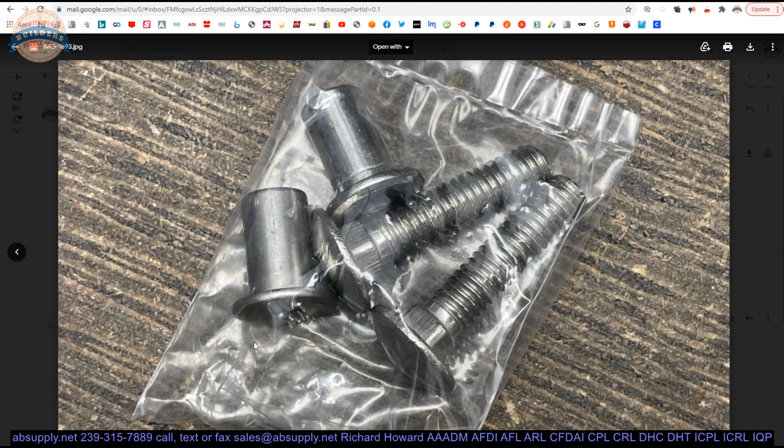Here's the item that we are looking at. Let's take a look at some photographs that we have linked to down below. There's the box, the guard in its packaging, the guard itself, additional views on the item. That's the underside. That's your bolt package. Carriage bolts, through bolts, really. Or sex bolts is what they are, but that is a carriage bolt that's there. Can't really see it, but it's a square head.

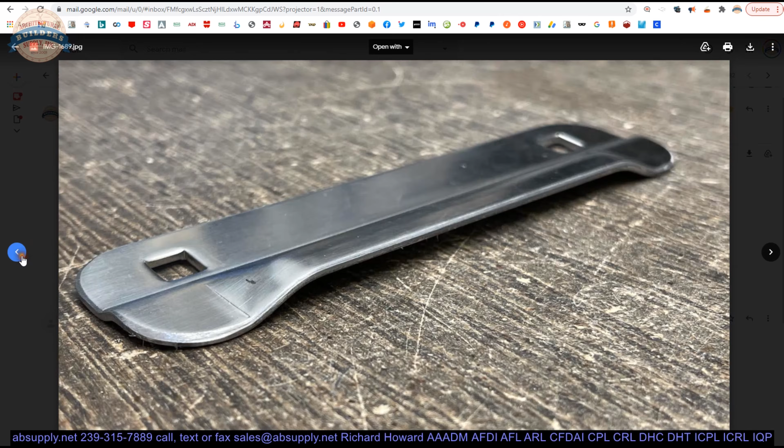Okay, let's take a look now at the extended description of the item. We'll scroll down. 1.5 by 6, lock type cylindrical. Sure, you can use this for cylindrical latches. You can also use it for a mortise lock. There'd be no reason that you couldn't use it for a mortise lock. I think what they're saying is that 1.5 is narrow enough to the point where you won't necessarily have a conflict.

That's the frame. Sorry that's so awful. Let's just get rid of that. We really don't need it anyway. Okay, so you've got a petite little latch guard there. Well, your rose from a cylindrical lock, you want to make sure that that is not going to run into your latch guard.

Okay, now if you have a really large diameter, you'll have latch guards that will have this sort of scalloped preparation in them because they're greater than 1.5 wide. If you have a mortise lock, you probably won't have that sort of problem, although you could. You have to be mindful of that. You have to be mindful of the backset from the edge of the door to the center of the hole.

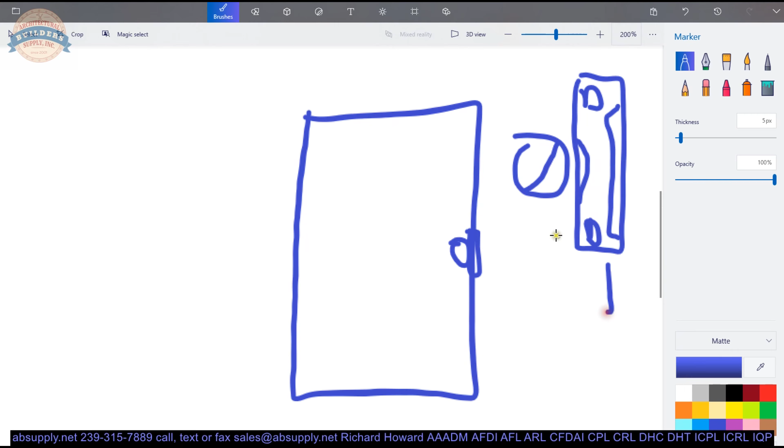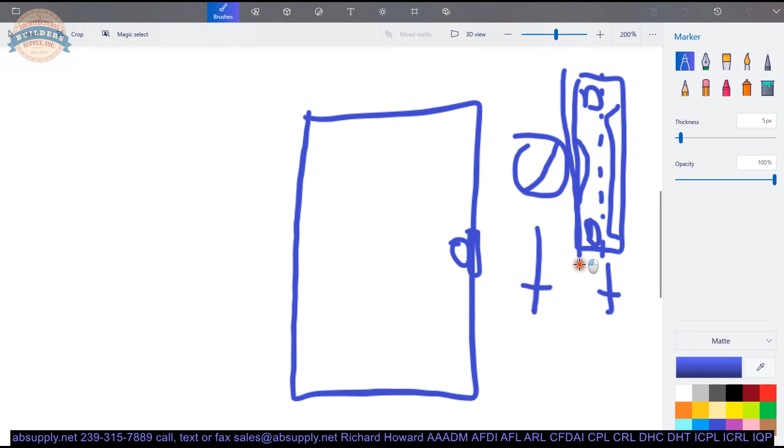Okay, and one dimension I didn't give you is the amount of the flat area that's here, which I'll give you so you know how much encroachment onto the face of the door you'll have to contend with. If you have a mortise lock with escutcheon trim, this would probably work out really well for it as well.

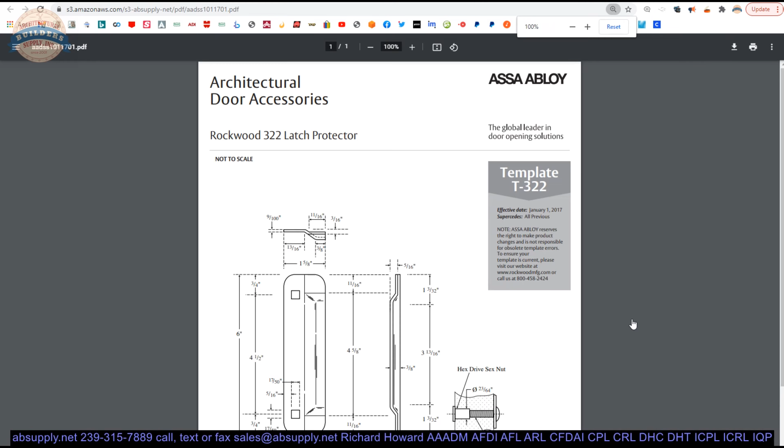Material is 0.09 thick with 1/4-20 carriage bolts and hex drive sex nuts. They're completely non-handed. You can flip that over. Let's look at the template first. Technical drawing of what the item is. All of the dimensions beyond what I've provided, and actually they provide that dimension that I want you to know.

It's 13/16. So from the edge of the door, you can count on 13/16 of it being consumed by the width of the latch guard. Okay, and I would probably run that dimension hard to the edge of the door so that the 1/8 of an inch that was in here, you had that relief that was happening here. Though I would check that first.

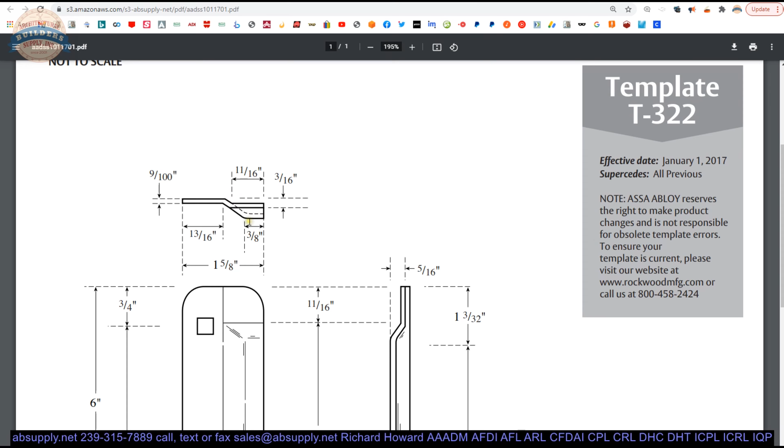You might need to hold it back a small amount because you want to make sure that the distance from here, yeah, 3/16. That's basically what we measured, 3/16. From here to where your frame is going to start is adequate given the inset of the door. Your door could have some inset.

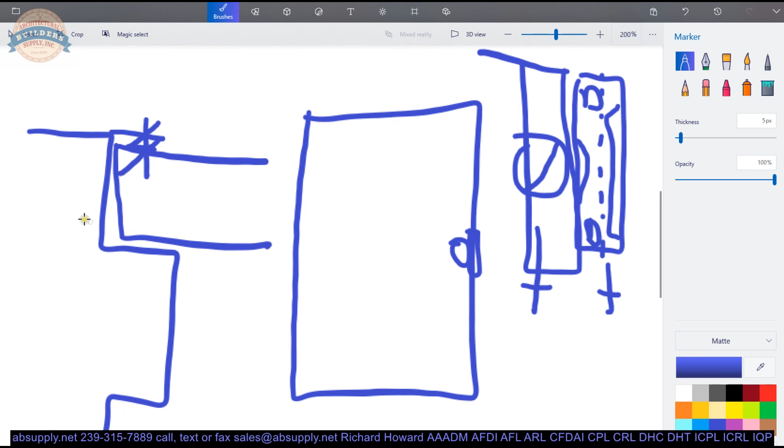And then inset, just to belabor that point, here's your door. The inset is the dimension from the face of the frame to the face of the door, that dimension. You may have 0 inset. It could be 0. And it's very likely that there's an inset as well. So that's why that's offset.

Or exit, no, well, probably not exit device trim. It could be an exit device trim if it was a mortise style. A rim exit, surface vertical rod, people want latch guards for rim exit devices. You can't get to that latch. So I've always kind of wondered about that, why someone would want that.

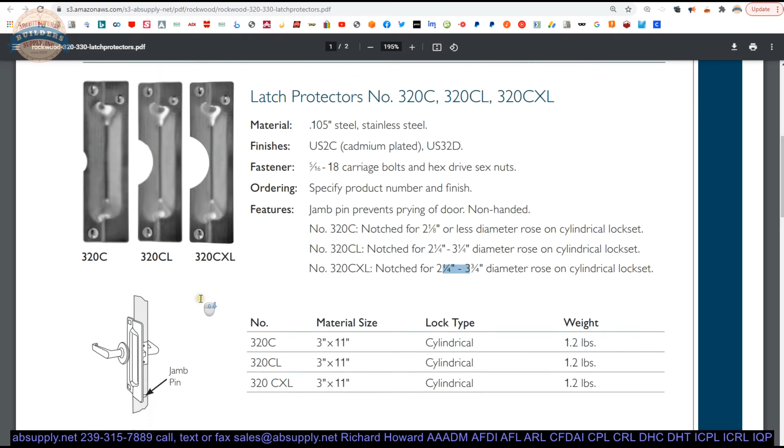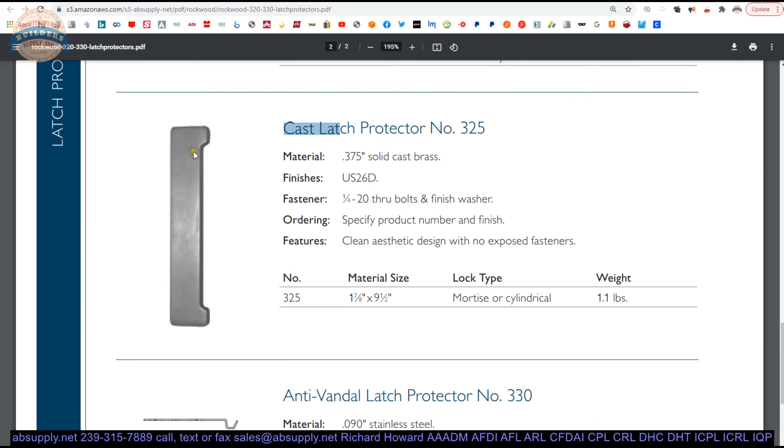Anti-vandal latch protector here, the 330. Your cylindrical lock would mount through that hole. By the way, we call that a turtle prep. This is for a cylindrical lock that requires through bolts at 12 and 6, 1:30 and 7:30, whatever. You see my point. Okay, this probably will work with every grade 1 or grade 2 lock there is. Probably isn't one that won't work there. Now, let's take a look.

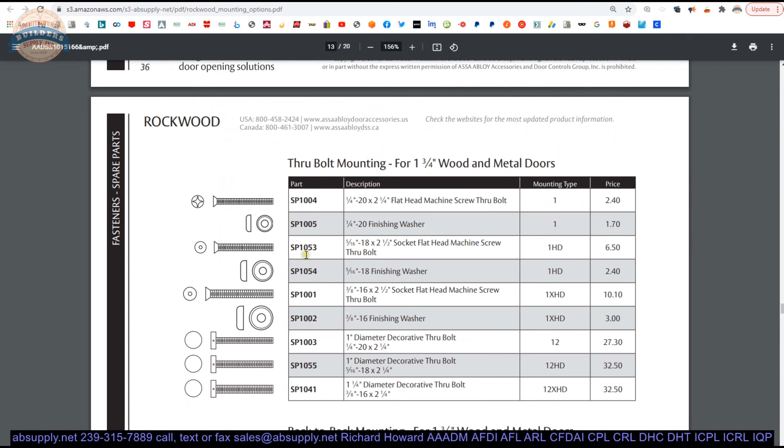There is a mounting kit parts master table. That's interesting if you have Rockwood pulls and you're looking for replacement bolts and bolt packages for that. This would be the document to review. That SP1004 is extremely common. The SP1025 is probably the most common bolt we sell for back-to-back mounts.